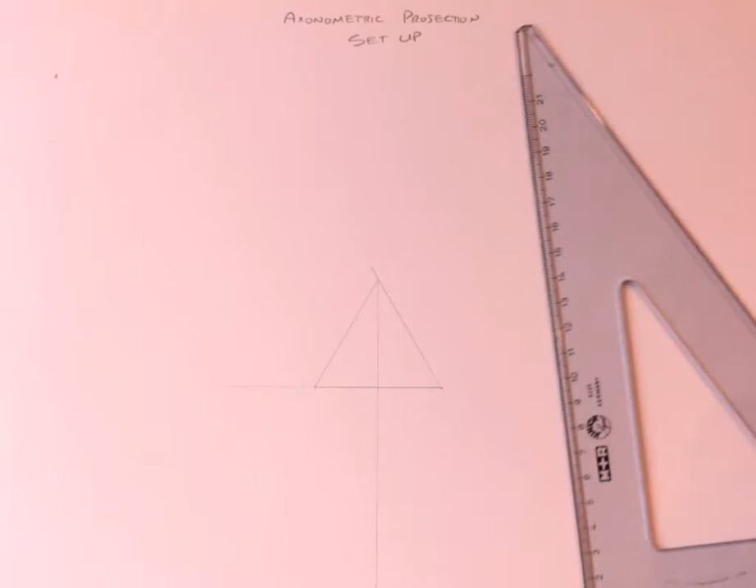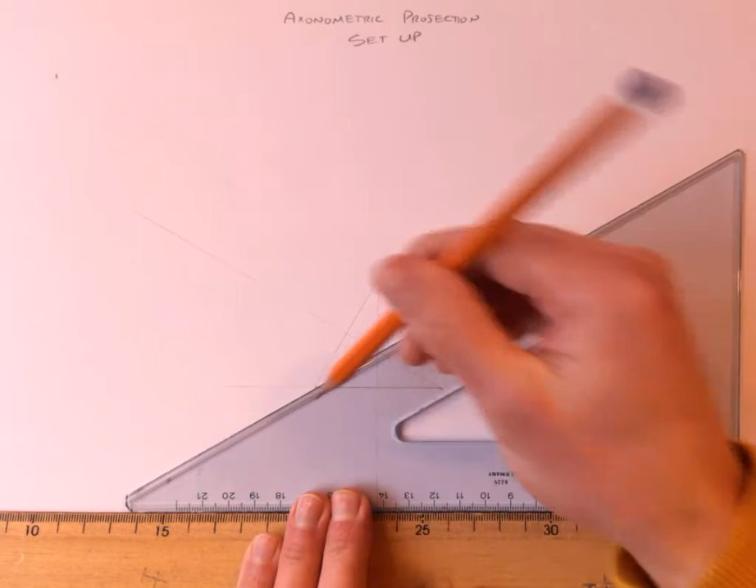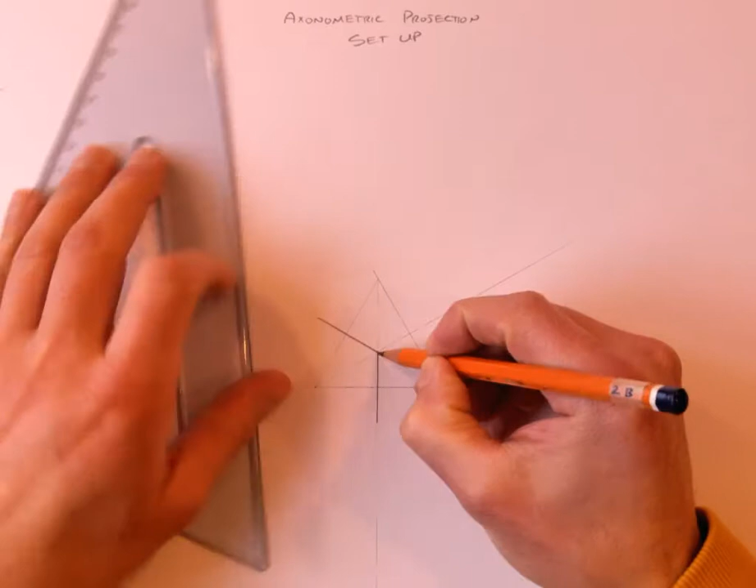Our axes are found by a vertical line, a line at 30 degrees to the left, and a line at 30 degrees to the right. And so when we're dealing with the axonometric axes, those are the lines they're talking about. 1, 2, and 3. Everything is going to be based around those 3 lines.

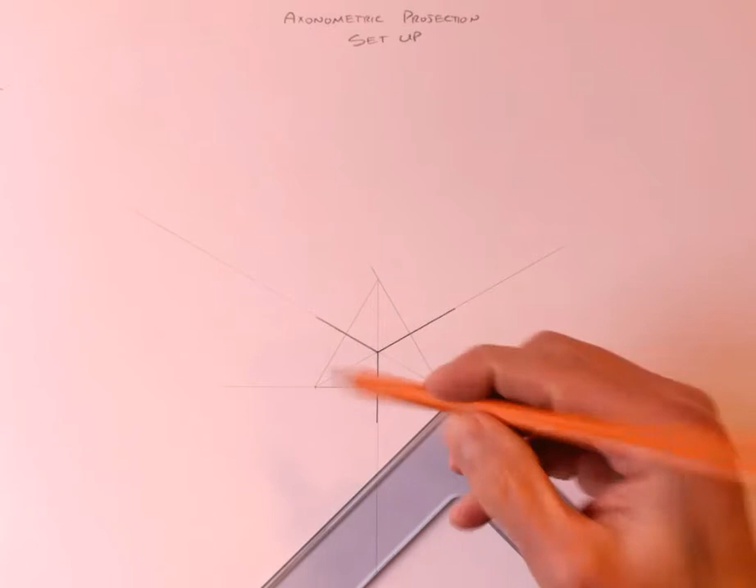So the plan is fairly simple to draw up. All we have to do is come down here anywhere, down towards the bottom of the page. From that line, I'm going to come off at 45 degrees and 45 degrees. That gives me my setup for plan. So that's done. My plan view will sit in between those lines.

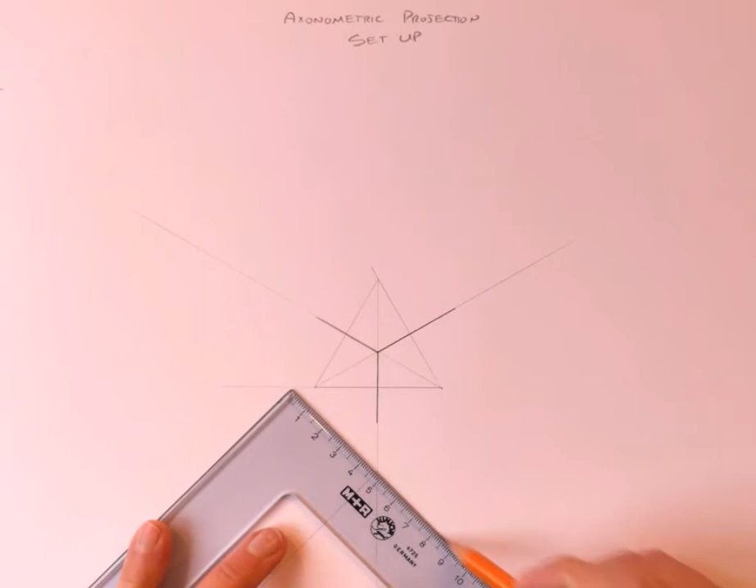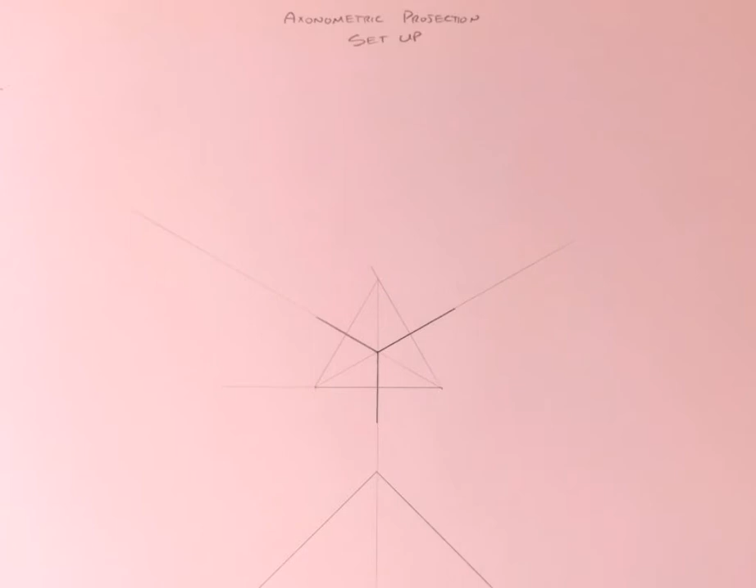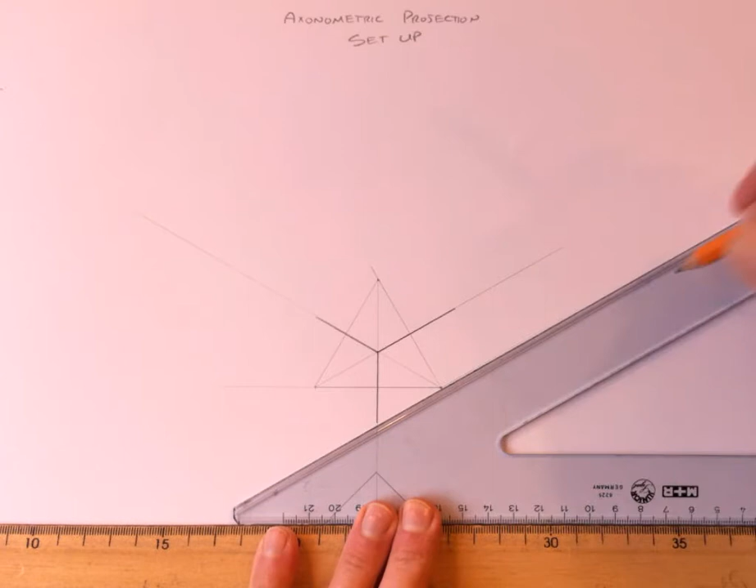Elevation or end view, or it can be swapped, so this could be the elevation, this could be the end view, but to set up these 2 sides we're using 30-degree angles, and I'm using the corners or the points of the equilateral triangle. Project out my lines. Doesn't matter how far, there's no set measurements for any of this. I'm going to start off with a line parallel to the side, which is 60 degrees. So I come over here, set up a 60-degree line, and that gives me the outer point.

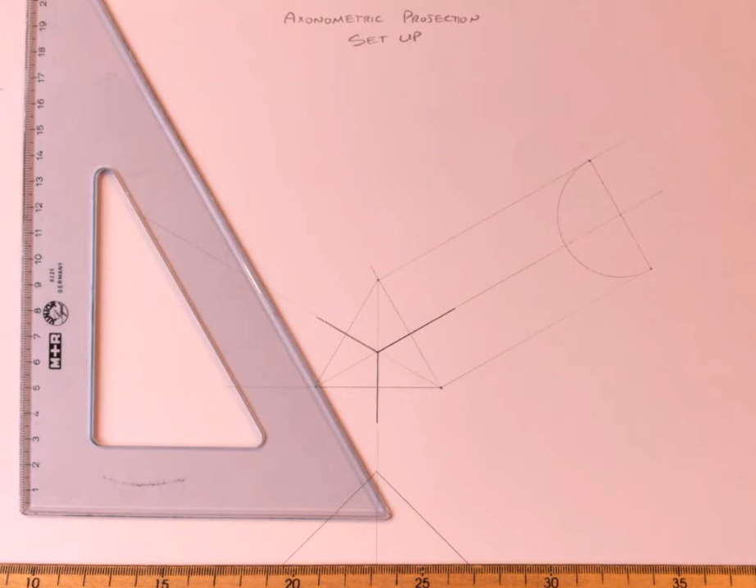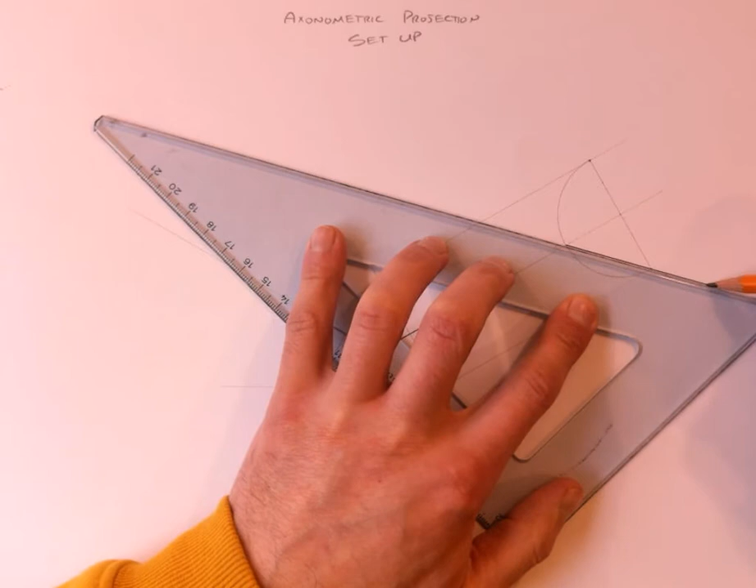Take my compass and I'm going to draw a semicircle. And draw the semicircle, very importantly, back towards the triangle. Don't draw it out the other side. That will give me my axonometric axis. So I'm drawing the points on the semicircle. There to here. And if that's done correctly, it should be giving you a 90-degree angle here, which it does.

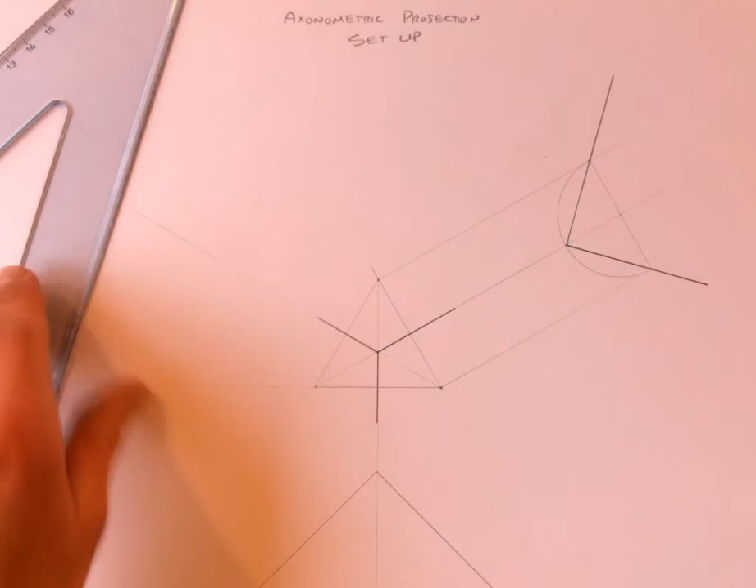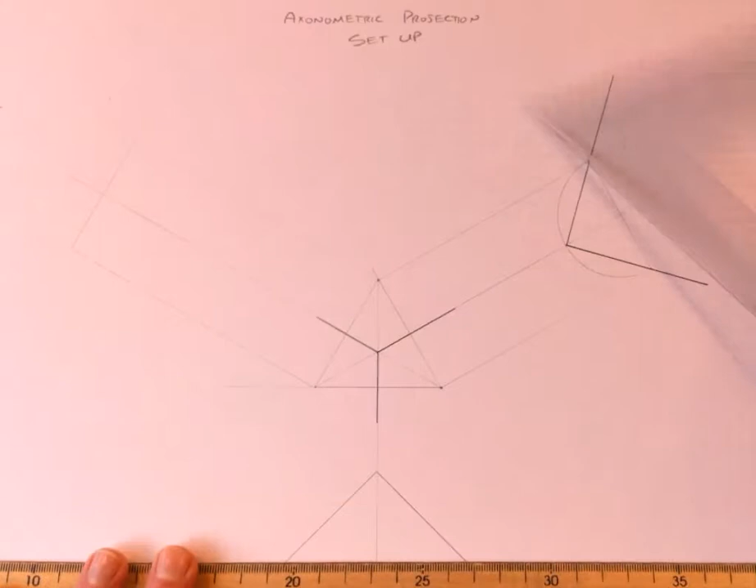Same setup on the other side. So I come along, take out my lines, and again there's no measurements, so the distance to come out doesn't matter. Again, I'll have a 60-degree angle when I go to draw my line. 60-degree angle here anywhere at all. Same thing, gives me my outer points,

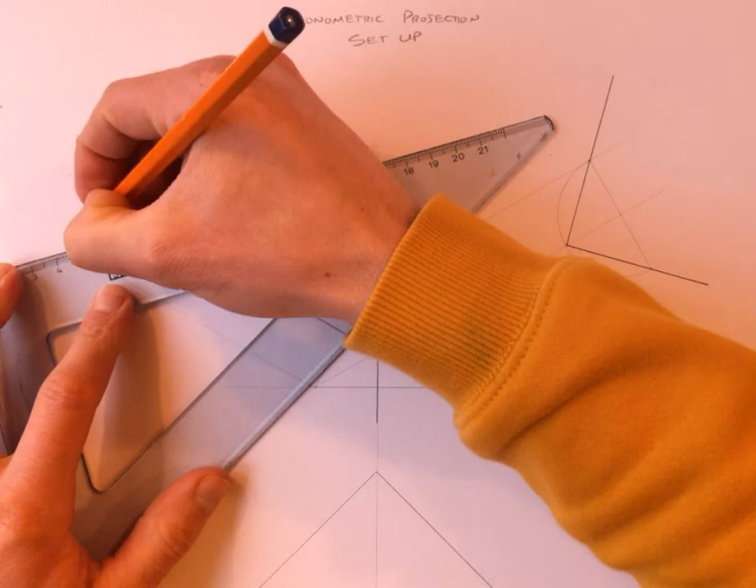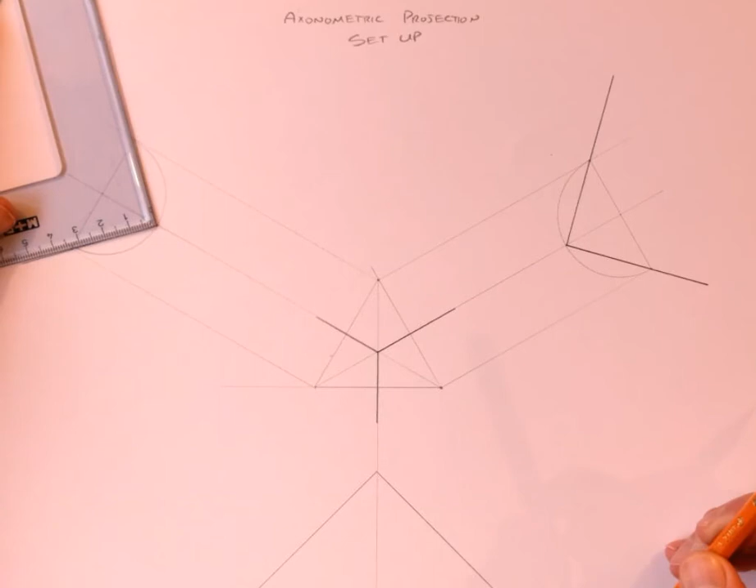and I'm going to draw a semicircle, and again draw it back towards the triangle, not out the way. So in other words, back this direction towards the triangle. And again, that should give me a 90-degree angle. Check it there, that's pretty good. And that is your setup. So anytime you're doing an axonometric projection question, that is the setup you need. They're all the same to set them up.

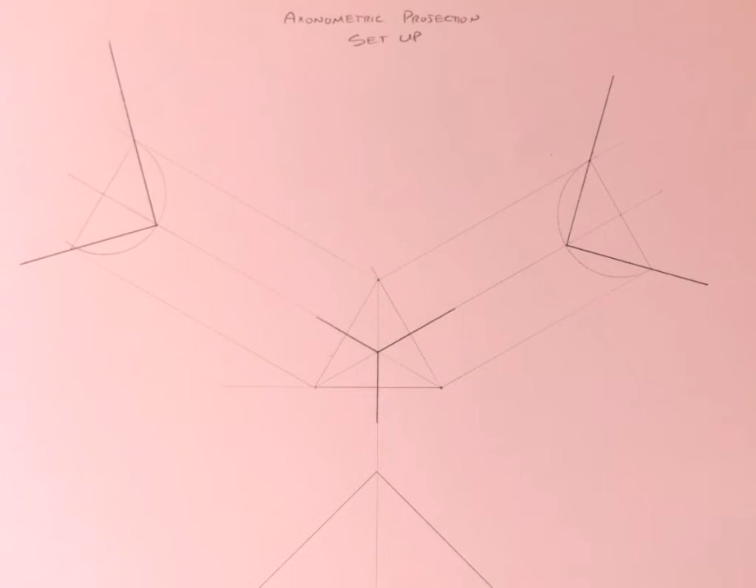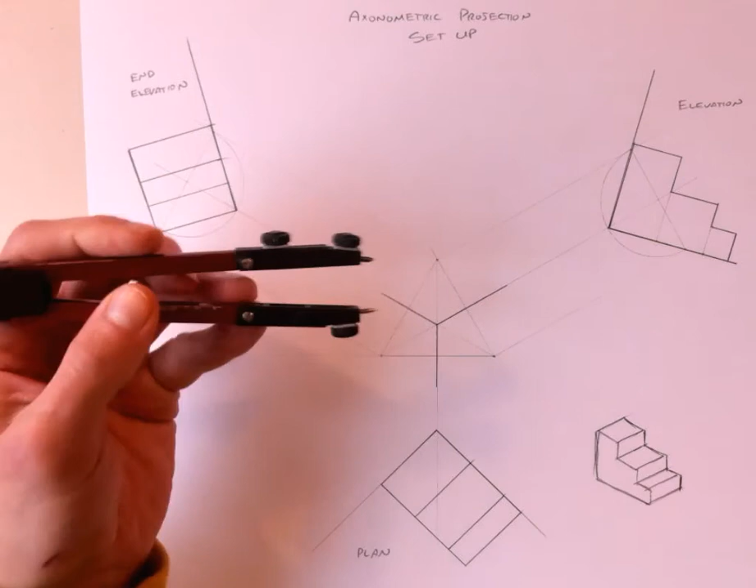So I've just dropped in the elevation, plan and end elevation just to show you how they'd be set up or dropped into place. Heights can be copied between elevation and end elevation. So I take a height from elevation, I copy the same heights to end elevation, and that goes for all the steps. So we take the step, I can copy the height over to my end elevation. Width, so the width of the elevation is copied to the plan.

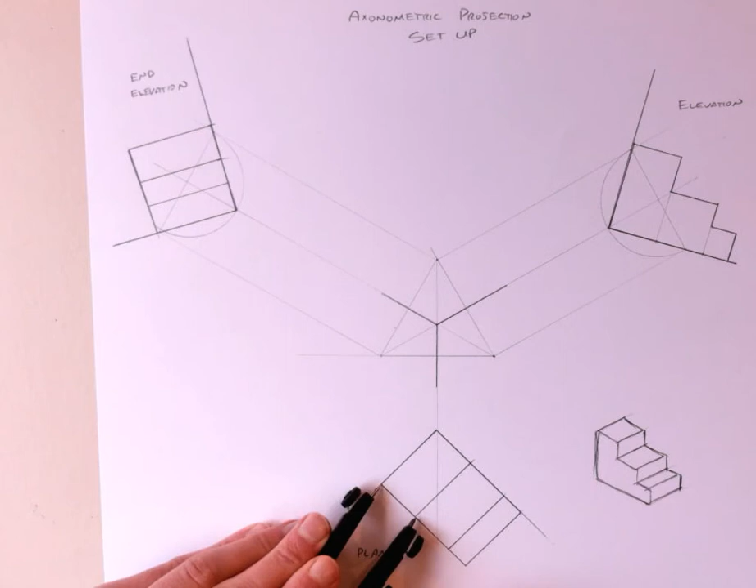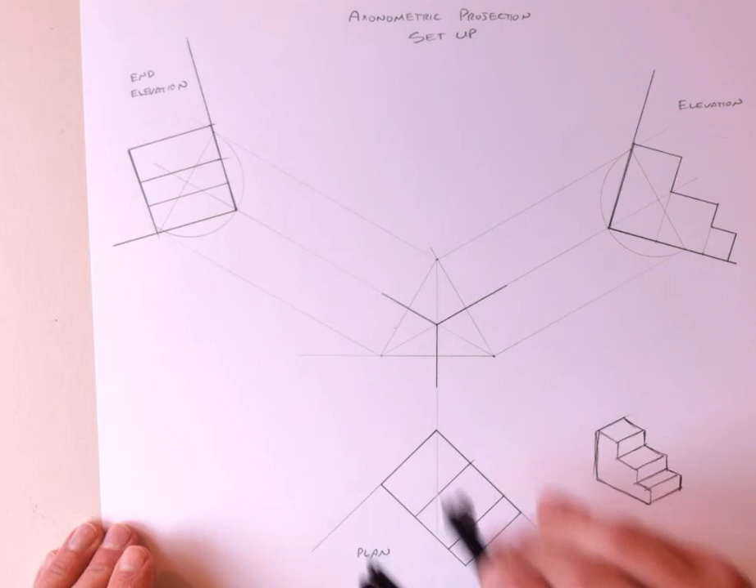Likewise, any measurement I take, so the length of the first step there, copied down to plan, or over here, it doesn't matter. Likewise, my width of the end elevation can also be brought to plan. So there are measurements that are interchangeable between elevation, plan and end view.

Now I've showed the finished solution. You can use any two views, so you can use elevation and end elevation, elevation and plan, or end view and plan. Most likely it's always the elevation and plan, or else elevation and end view. So any two views to draw it. You don't need the three.